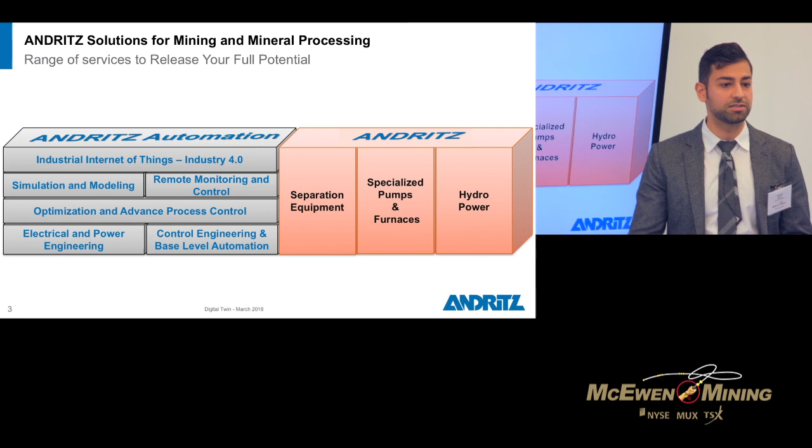And on top of that, the cherry on the top of our cake, is the industrial Internet of Things. But we also provide a lot of equipment in mining. So separation equipment, solid and liquid, like thickeners and centrifuges, filter presses, as well as specialized pumps and furnaces for dewatering, and also hydropower. So we provide equipment, and we are providing the equipment knowledge as well.

But let's start the talk. So picture this. It's 3 a.m. in the morning. You have one person on site in your mill, and then one of the pumps downstream just fails, or something fails downstream, right? What usually happens is the operator starts to handle that somehow, because if downstream fails, it's going to back propagate all the way up. You don't want to lose your production. You don't want to lose your recovery.

What if an artificial intelligence knows exactly how to use the recirculation, how to use the retention time, how to change all the set points so that you end up having the least amount of loss of recovery, without letting the failure downstream back propagate all the way up, because it knows exactly how the mill is working, right? Does it sound very fictional? Well, we will find out. Not anymore. As Rob said, these things are out there, happening right now.

So we will focus on digital twin today. There are a lot of different buzzwords, and I'm happy that Nathan showed the graph that this one got into the 10 important buzzwords coming out. A couple of years ago when I heard this buzzword, I was like, is this a hype? What's happening? And this is not something that we invented. I looked into it, and basically NASA has been doing this all along. We've been doing this all along.

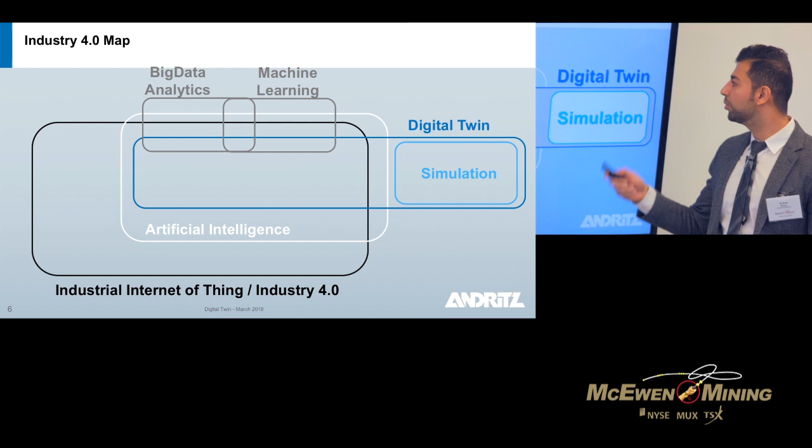At the end of the day, you want to make decisions, right? You want to provide value. Somebody has to make decisions. That's what is lacking in the mining industry. How do we make decisions automatically? That's where artificial intelligence comes in. But that artificial intelligence is very integrated with machine learning technology, with big data analytics, and also simulation. Everything is overlapping together, and we will see how important the digital twin is.

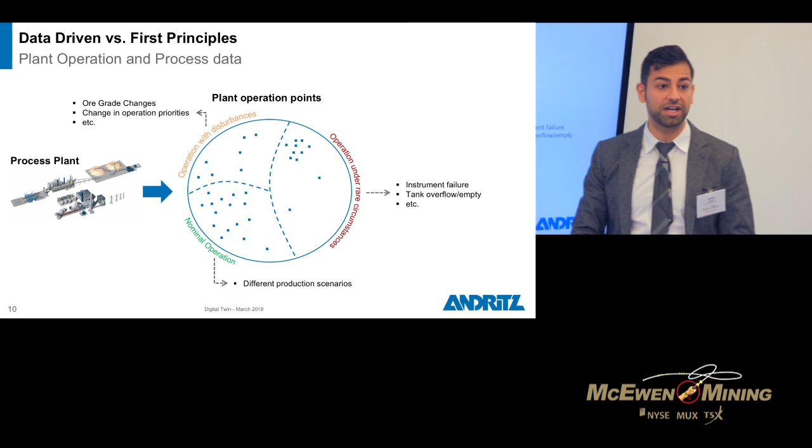But then comes the big problem, when things fail. The entire promise of your people is to make sure that doesn't happen. But it does happen all the time, though it's infrequent. What are you trying to do? You are trying to use technology to handle these infrequent problems when they happen, with disturbances and rare circumstances. That's what you're trying to do. But first of all, you don't have enough data for it. So when you use data-driven methods...

There is a concept in machine learning that when you have data for one particular mode, all your analysis will skew inside that mode because you have a lot of data for it, right? So when you use that, you are putting a lot of data in your nominal operation, but you want your artificial intelligence to be perfect, reliable on the places that you actually don't have data for, right?

Also, there's a lot of times you can't measure the data, right? Can you measure the SAG mill charge? Can you do that? No, we don't have a sensor to measure that. Can we measure the scaling inside our evaporator? No, we don't have a sensor to do that, right? But those are very important information that we need. So basically, you end up with islands that will never converge in your algorithms.

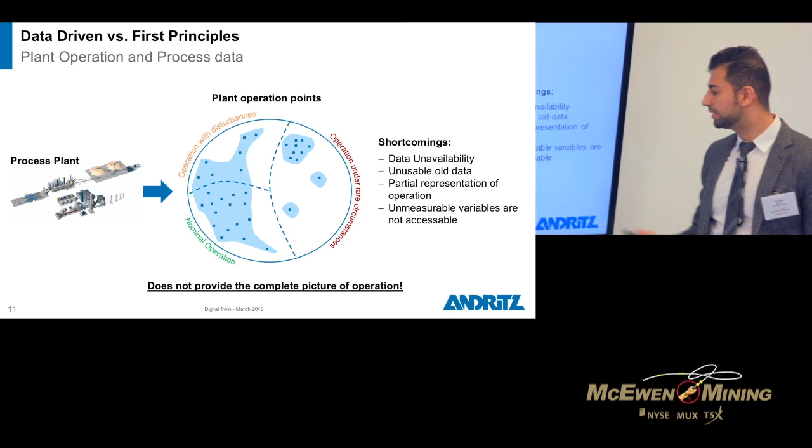So what are we going to do? You will have the data unavailability and a lot of unmeasured variables. We will not have a complete picture. So what are we going to do? We have to complement this. How are we complementing it? We will make simulation and models of the process that are not based on the data. They are based on first principle models. They're not based off the equipment data sheets, but based off the physics and the fundamentals of how those equipments and processes work, right? By doing that, you will start filling the gap.

So again, this is not this method or that method. These two have to go hand in hand. They are complementary. When you do that, then you start having the whole entire picture. And that's when you start having your artificial intelligence perceive its environment. We are making the environment ready for our AI to work, right?

And I'm sure that you've seen this, that there are really nice AI algorithms out there, companies providing that. The promise is, give me all your data, I will provide the value for you. That's great, but that's the ugly truth behind it. That's the ugly truth. Okay.

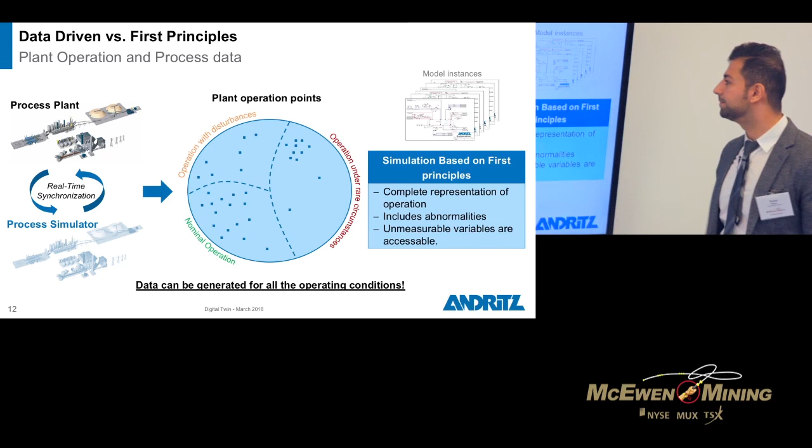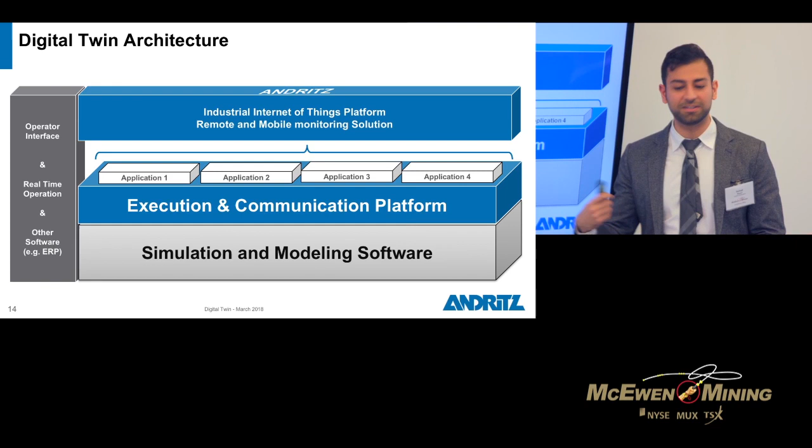So again, we're talking about simulation and modeling. So what do we mean? There are different levels of simulation in mineral processing. There's the macroscopic level, which basically says I'm going to look at the plant-wide, I'm going to look at the equipment, I'm going to look at my pressure network, and all that. There's discrete element simulation and molecular. What I'm talking about in this talk is the macroscopic level, right? I'm not going to the discrete element and molecular.

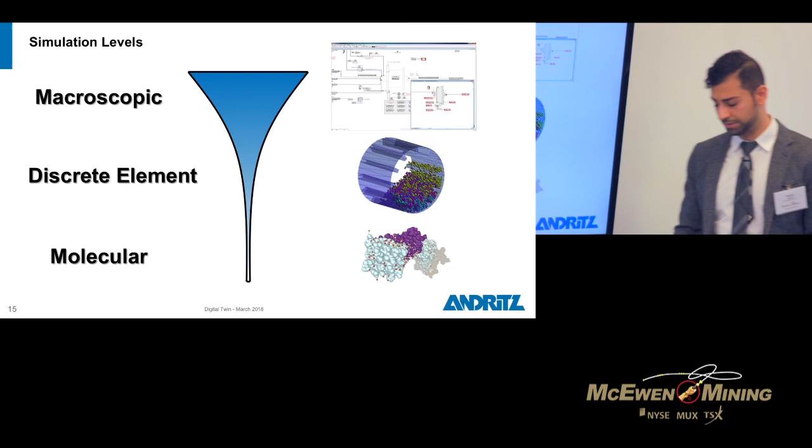So how do we model the mineral processing plant, the mining plant? There are different modeling techniques, and you know that better than me. I am not a mineral processing guy. I'm not a chemical guy. I'm in controls and using all these technologies.

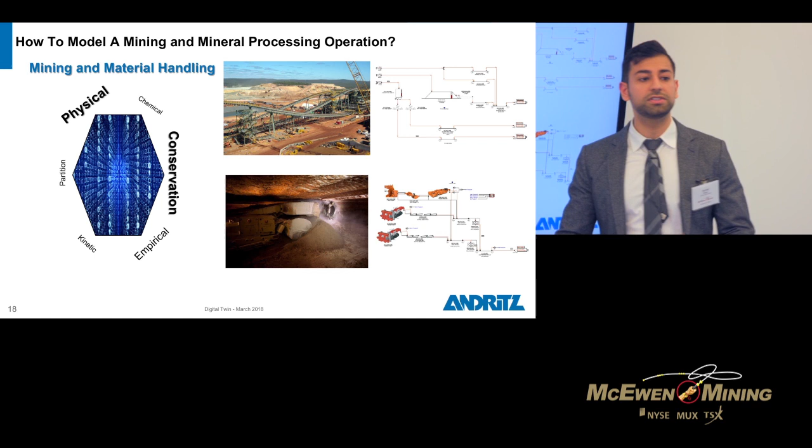So there are physical differential equations, chemical, partition, conservation of mass and energy. There is kinetic and empirical. But we're not using all that in all different sections of the plant. For example, in mining and material handling, we are using physical and conservation laws mostly. And then in the comminution area, the partition theories and partition modeling are added to the conservation and empirical models, right? And then that allows us to model the SAG mill, the ball mill, the flotation, and all,

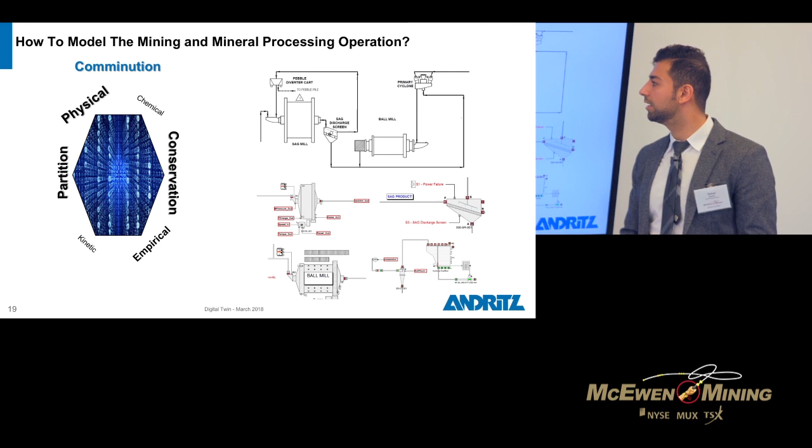the hydrocyclones. And then on the flotation and thickener, we are using chemical and kinetics a lot more, right? You want to have all the chemical reactions that are happening, what is the rate of the reaction, what are the sedimentation theories, solubility, and everything has to be taken into account. So that is going to be used as well.

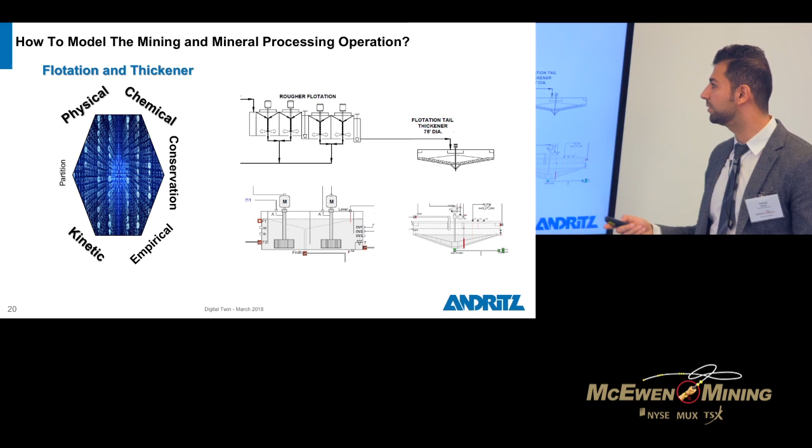But the model itself is not the only factor for your digital twin, right? There are more factors. The software that you're going to use for your digital twin has to have scalability, right? You want to model the entire mill and mining process so that you can connect it to your operation. It has to be scalable. We're not talking about just one equipment here. We're talking about the whole plant. You want to have the connectivity. You want to be able to connect it to the real-time operation.

All the models have to be state of the art. So the software you're choosing has to have all the information that is available right now. Also, the algorithms that are going to make the convergence of your model happen need to be fast and stable. You can never crash, right? You are running this in real time.

You can never crash because, see, that's a problem with artificial intelligence. Humans are allowed to make mistakes, but somehow AI is not allowed to make any mistake, right? So it has to be 100% reliable, but humans can be 90% reliable. That's perfect, right? But AI can't. So you have to be always reliable, right?

But last but not least is the fidelity, right? You keep hearing this fidelity, right? And I'm going to talk about fidelity a little bit. What does it mean?

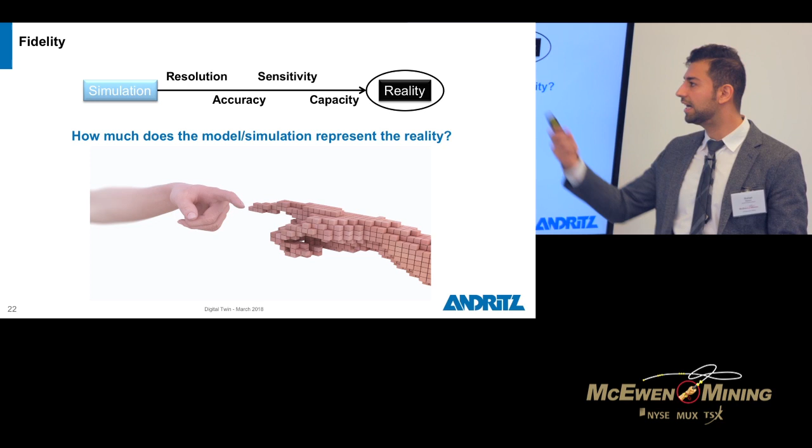So fidelity, the definition is how much the model or simulation represents the reality, right? How close we are to the reality. And there are different factors that can let us measure the fidelity, right? But how do we make the fidelity happen in our simulation? So we need to get metallurgy and process data, add the mechanical and physical values, plus the control and logic. All of that has to go together hand in hand.

So it's not just metallurgy or process. We also put in the human characteristics and the intervention, right? So for example, for one of our customers, we had underground mining and shift changes. That shift change and the people going and actually being late on the job and all that had to be inside the model. Otherwise, the model is not representing the actual reality, what's happening.

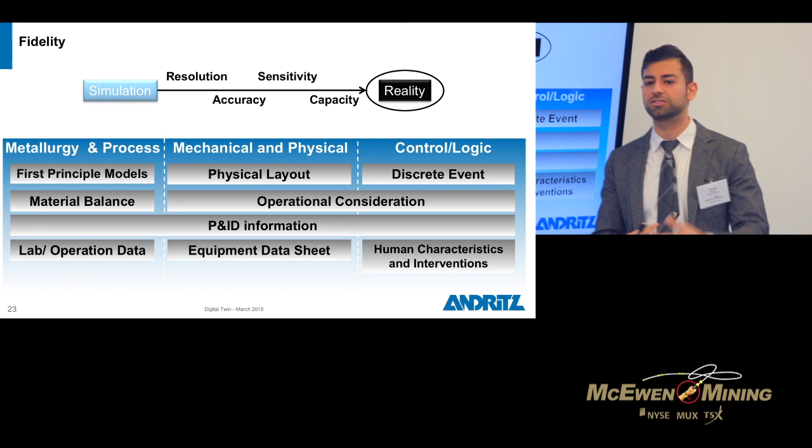All the P&ID information, all the equipment data sheets, and everything has to go inside there. So we're not talking about just a metallurgy software. Otherwise, it's just not going to happen.

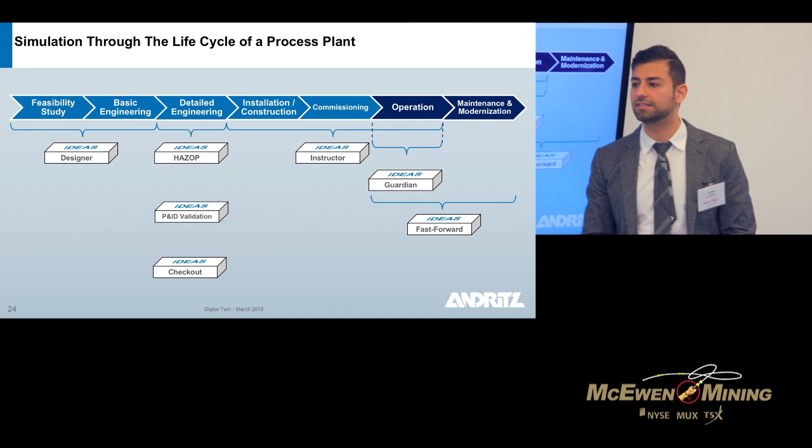And where is my plant going to be in the next 10 hours? Am I going to hit any of these constraints that I have? If I make this decision right now for maintenance, how much time do I have before I start up this particular area? So I can fast forward, see what's happening, come back, and then make the decision.

Okay. So far it was all concepts. And I know everybody's like, these are cool concepts, but are we doing it now? Yes, we're actually doing it now. So I'm going to talk about a couple of examples that people in different mining operations are using. One of them is automated design. On the feasibility study, we can automate the circuit design so that we know, for the entire lifespan of our mine, what design will give me the least amount of power usage, and which equipment I should use for that design.

Now, all the engineering companies do that, right? So this is like when Uber came and everybody was like, but we have taxis. So why do we need Uber? And then you see the difference.

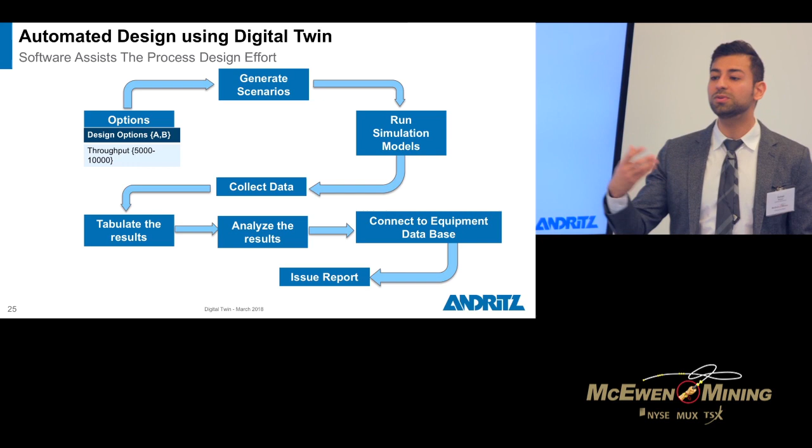Yes, our engineering companies do tell us which design gives us a better power saving, but this is way more cost effective now because it's all automated. Everything is automated, everything is integrated. So I can run it many, many times, many different scenarios.

How does it work? I have the model of my plant, and then I have different options that I want to try. So I want to try all the different throughputs that I have, with different ore grades that I have, and then I generate the scenarios. So permutation of all different scenarios that might happen, and then I run the simulation models.

I collect all my data that is important for me, put them in tables, analyze the result, and then connect it to the database. So now, not only have I designed it, I will look automatically to the database of the equipment providers to find which equipment will give me the best result that I'm looking for. So that will be the starting point of the engineering if you want. And automatically issue reports. Okay, so I'll show you live in action.

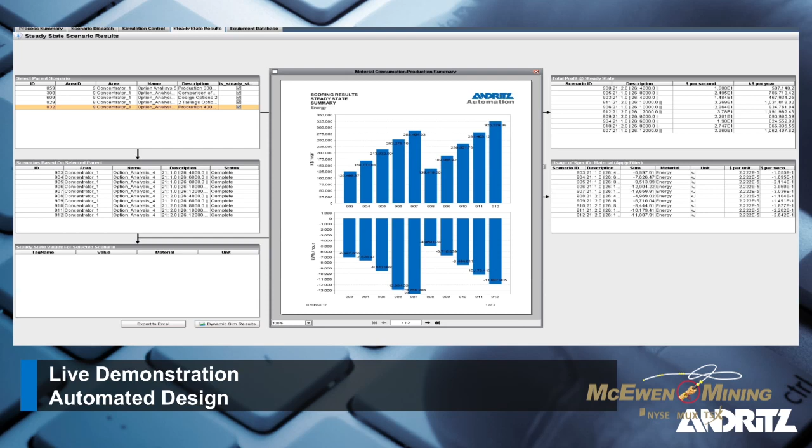Okay. Now here I want to have an automated design of different scenarios that I have. So they are permuted, and these are all my different scenarios that I want to run, and I'll show you in action. Then automatically I can run all these different scenarios, right? You can see it's running, but it's a little bit slow because my computer is running a little bit slow there.

Okay. And then I can generate all the reports that I need, right? So I'll generate all the reports for power. So for example, in this study that we did for one of our clients, they wanted to know, the SAG mill inside the entire circuit and the HPGR, when they put it with all the PSDs and everything, which one in 10 years will use less power, with the throughputs that we have, right?

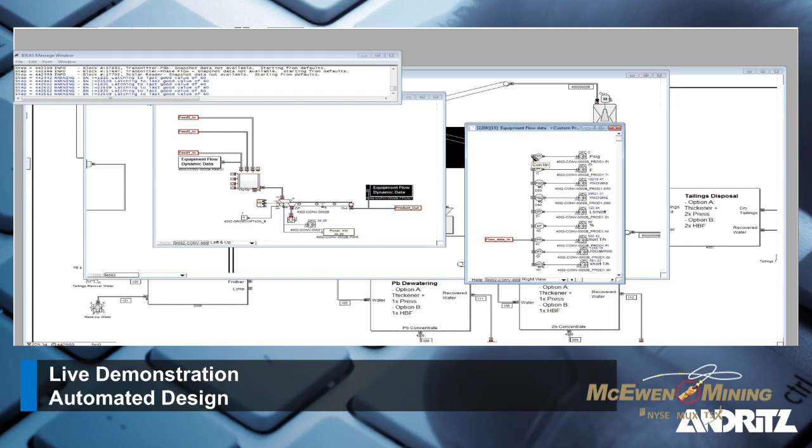So we get all that, but then there's a really interesting catch here: when you have the model, you can get every information that you need. For example, the PSD for the entire circulation, your mill charge, other information that you never can get and can't analyze, now with your model is available to automatically analyze and see which one gives you a better value for your operation. And you can decrease your CapEx and OpEx.

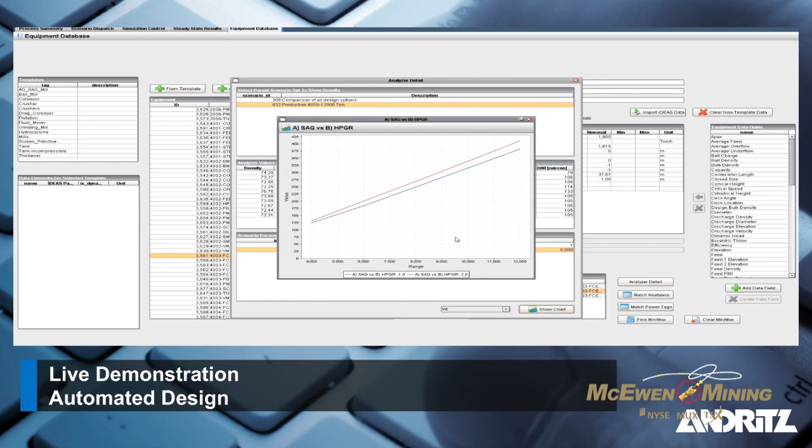So another customer is looking to see how to decrease the amount of metal usage for the design of the pipes and everything else, so we can minimize that design and decrease their CapEx. Okay, and then you can make all the reports on what are my pressures everywhere, what are my flows, my temperature, and you can also use analytics and artificial intelligence to make the decision. Okay, so that's one.

Now the other one is the failure analysis. So basically, now I have my digital twin that has all my models, all my circuit. It's connected to my control system, right? And it's connected to all the data sheets. Now, I want to see if any failure happens inside this plant, what are the consequences? So this is a hazard study that we do, right?

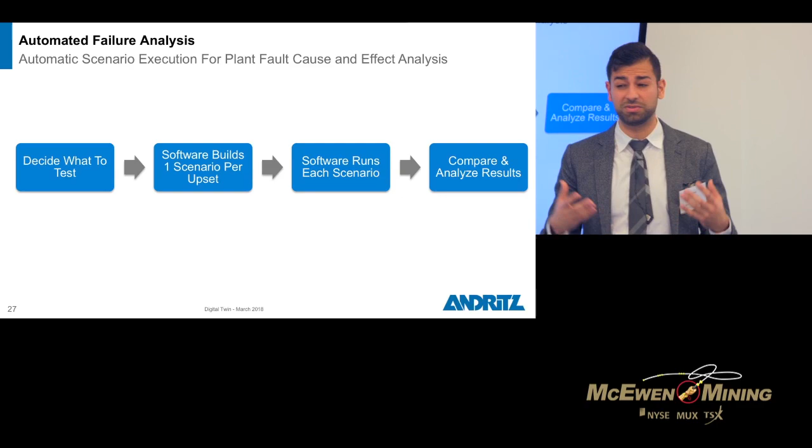But we've all been to hazard studies and we know how tiresome it is. And it's never perfect because it's really hard to look at every possible scenario, right? But now we are doing it automatically. Not only that, I can see all the transitions happening as well, which we could not see before. And the idea is very simple. I have a very high fidelity model that I connected to my execution platform, and I will run it with different scenarios.

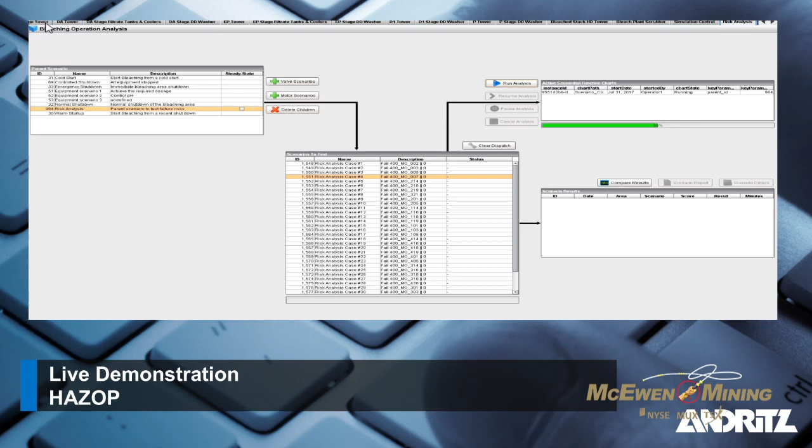And he said it was very tiresome and hard to have my people test it. I can't test it on a real plant. So then he saw this and he was like, oh, now I can run it automatically every time. Any changes, I can do this failure analysis and see if it's actually improving anything or if it's not, right? So let's see it in action.

So now this is the entire plant simulated, and you can see the model behind it with the HMI in front of it, right? And the model behind it. Now the scenario that we made here for this demonstration is to look at all the pumps in that plant failing.

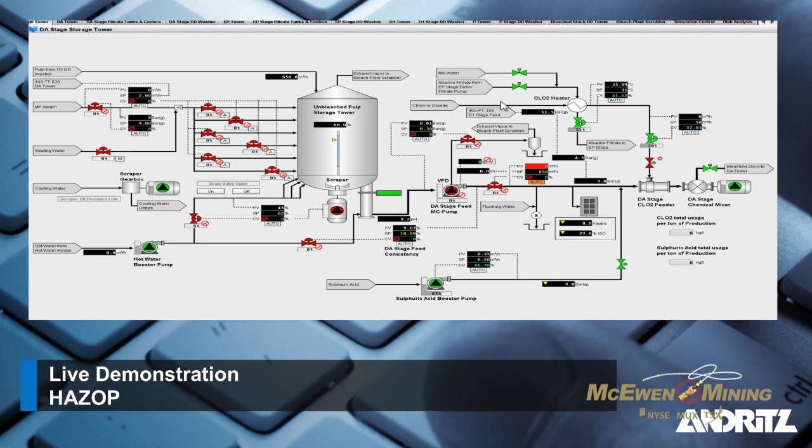And what's going to happen in the next 4 hours, how the control logic and control system will react to that failure, how all those interlocks will behave, how every characteristic in the plant will change, how are we going to react? Are we actually protected or not? So what's going to happen, right? Let's show it in action.

Here. Okay, this is a good shot. Yeah. So you can see that our platform is running, right? And then it starts going over all different scenarios one by one, failing a pump and seeing what's going to happen in the next 4 hours, right? And capturing all that data. But we don't need to wait 4 hours. We just run it in like 2 seconds, right? All that 4 hours is running in 2 seconds.

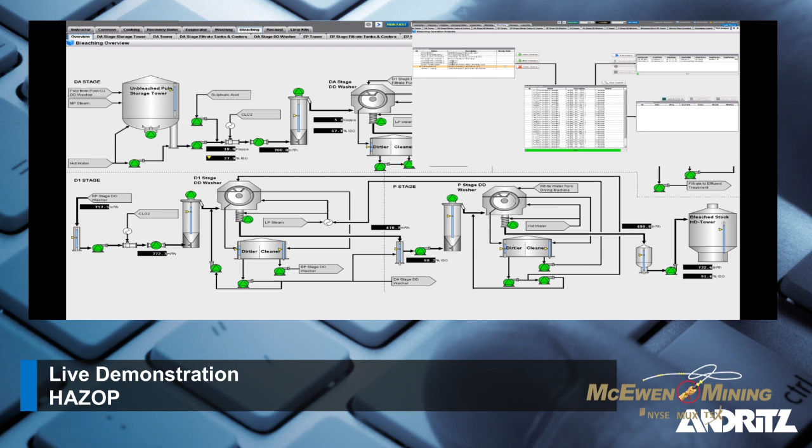So we can do all that and let it run for, I think, the whole entire operation, we had to run it for around half an hour to get all the data. Now, the thing is, these become very cost effective now because the human is not doing them. You just build it once and then you're going to run it as much as you want.

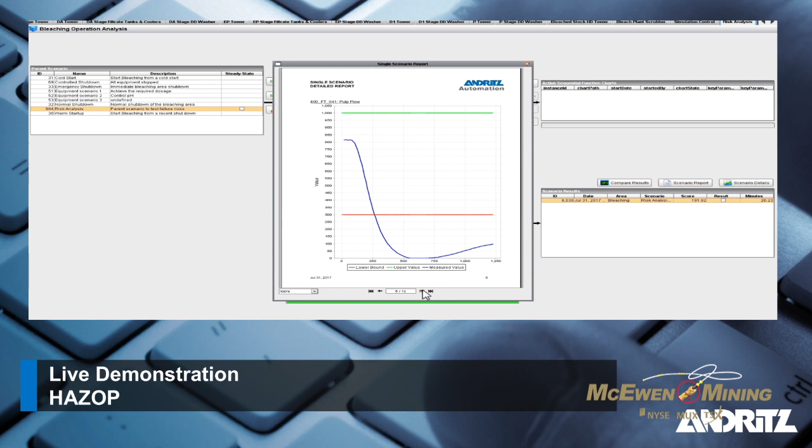Okay, so let's look at the results now. And then you can look at how every aspect of your plant behaves to those failures, right? So did we go over any high limit or low limit that is important for us? We can then put values on those and penalize the different scenarios and understand which failure is more catastrophic than other failures, right? And use that to actually prioritize our alarming.

One thing that one of our clients showed me, and I didn't think about it either, was: I'm going to use this to show the operators how much time they have to react to certain failures, right? If you don't react in the next 10 minutes to this alarm, see what's going to happen. This is going to happen, right? And then they can see it. And then after that, we can see which failure actually has the biggest impact in the plant and prioritize.

Okay. Let's go to the next one. So far, we used the idea of digital twin for automated changes and design. Now we're going to talk about the digital twin connected to the real-time operation to provide value. The example that I want to go over today is the density virtual instrument, right? So in the mills, the SAG mill, the ball mill discharge going to the hydrocyclone, right? The hydrocyclone box density is very important.

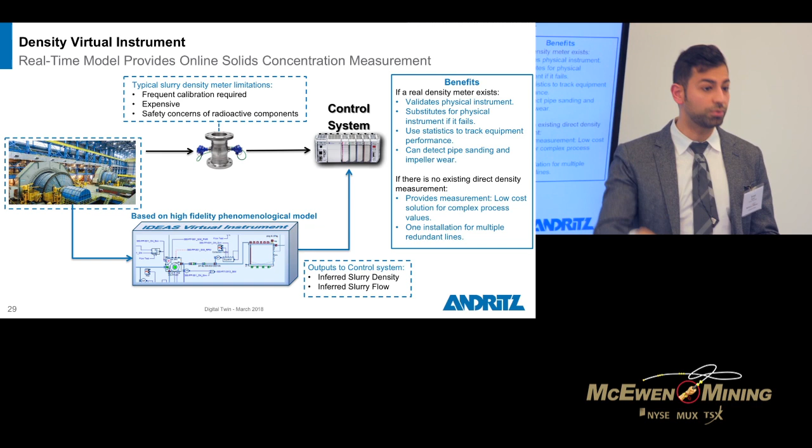If you keep that density very close, then you will have the P80 variability very small, right? And when you do that, then you can optimize. So that density meter is very important. But the density meter itself is not reliable. It's nuclear, so you always have those radioactive problems, and it's always expensive, right?

And usually what we saw with the clients is that they don't rely on it after a while, right? But our control strategy for optimization is based on that density value. So what we're going to do: we have a very high-fidelity model of pumps, cyclones, the pipeline, and everything. We put it together, we make the digital twin of that circuit, and we connect it to the real-time operation.

As soon as I get the data, I use reliable data, for example, power of the pump, speed of the pump, pressure, and other factors, data that I get from the plant. Now I'm able to infer the density and the flow in real time, right? And what are the benefits? Well, if I have a density meter already, then I can check if it's reliable or not. If it goes out of tune, I can raise an alarm.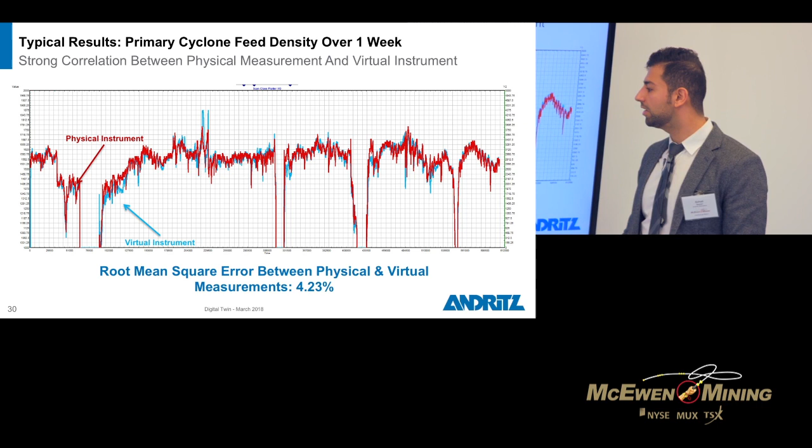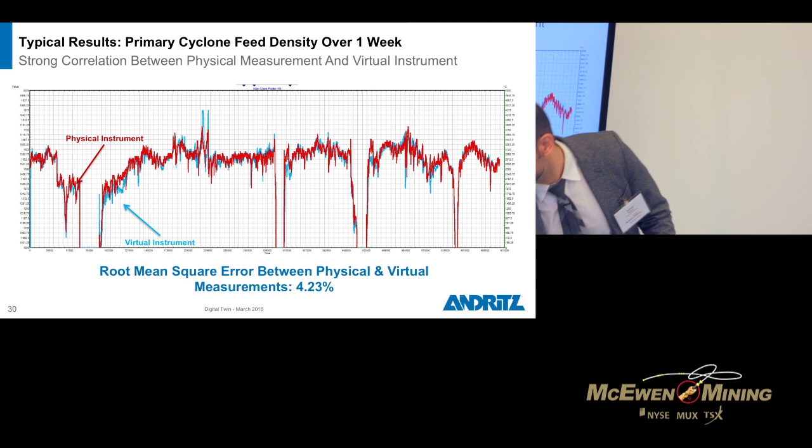Red is the physical and blue is the virtual instrument. And you see for the one week, the density meter was tuned just recently, so we thought we could rely on it, and you see that we were always on there. But then this is the interesting result that I like to share. This is an 18-hour operation. The density meter is yellow, the inferred value is green. When there is nominal operation, these two were going well, there was no problem.

Now this is an interesting part. The plant had a shutdown, and then they started up. As soon as they started up, we found a bias between what we are seeing and what the density meter is seeing. Now, where is this bias coming from? Then we looked at it. Guess what? There's sanding happening in the pipe, because of that shutdown. And now we are able to look at this bias.

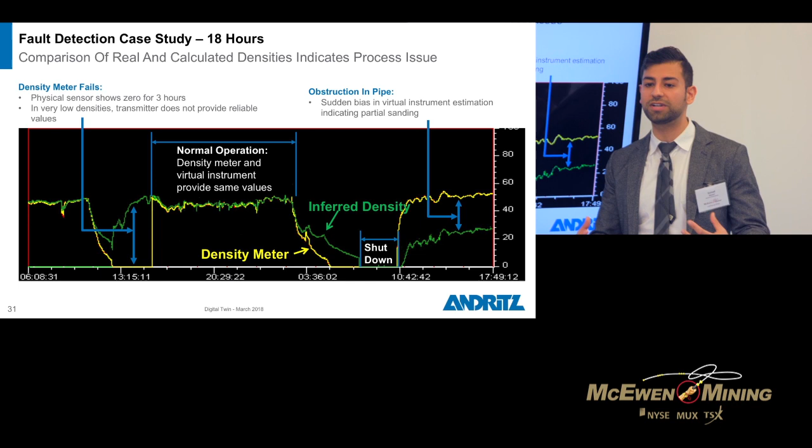First of all, calculate how much sanding is happening, close the loop into the advanced control system, and increase the pump speed to actually make that sanding go away if we want to. So if you already have a density meter and your virtual instrument, now you're able to protect yourself against that sanding.

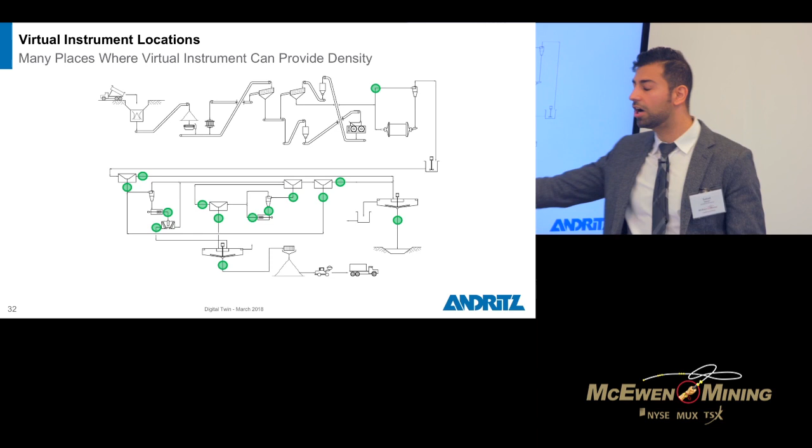Okay, where are we going to use it? Basically anywhere in the line that we need a density meter. You can put it on the thickener underflow, you can put it on your flotation, you can put it on your comminution area.

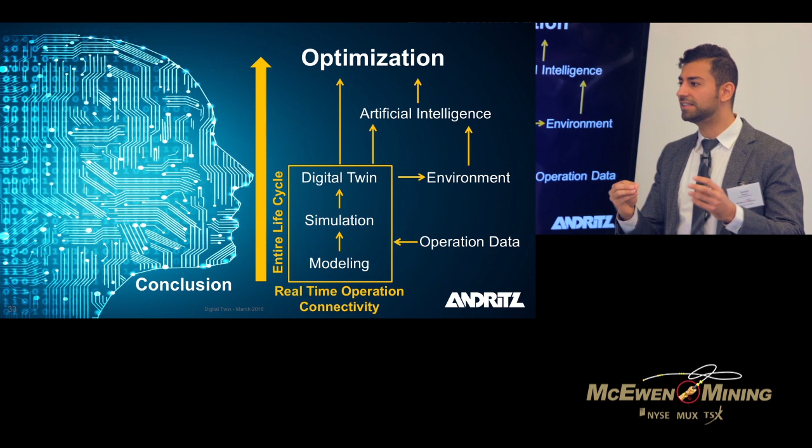Conclusion. So, what is the promise? The promise is optimization. That's a big promise, right? And now we're talking about artificial intelligence that's going to bring us there. But artificial intelligence needs that environment, needs that training, and if it doesn't have that, it will not bring that optimization. So here we have the digital twin to provide that environment, but the fundamental part of that digital twin is the modeling and simulation.

So what I like to emphasize is the ground-up approach. If you start from the top, you never have good results because your fundamentals are not working. It's like control. They come and say, hey, I'm going to put a very nice hierarchical control on top of your plant, and it's going to optimize things for you. No, it won't, because first you have to make sure that your fundamental control system works and everything is stable to change the set points. If you don't make sure that happens, then we'll have problems. So the digital twin is connected to the real-time operation and allows us to get benefits for the entire life cycle of the plant.